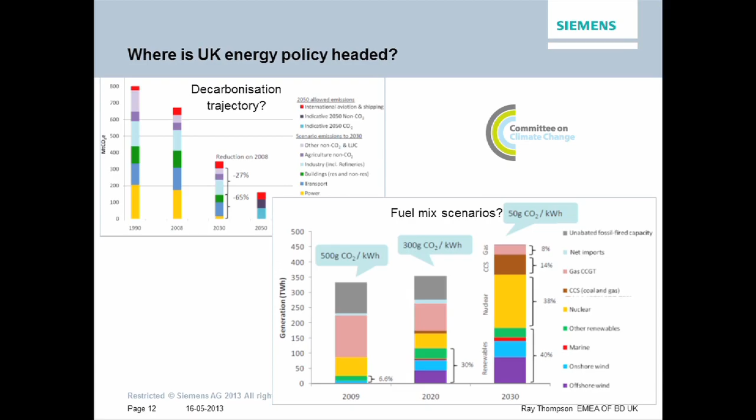Again, a busy slide, but this is really just about energy policy. Top left is the track we're on, trying to decarbonise UK supply, and perhaps more importantly, bottom right is the mix of fuel supplies we're going to have. You'll see offshore wind is this dark purple colour—we're really at the early stages right now. By 2020 we'll have significantly more, and by 2030 the aim is for it to be a big contributor to electricity production in the UK.

The question always about wind is, well, it's an unreliable resource—some days it's windy, some days it isn't, and that's true. I've never actually heard anybody suggest we should have an energy policy based solely on wind; I think that would not be the brightest of moves. But every day the wind is blowing and producing energy on our system, we're not burning fossil fuels. So even if you're a fan of fossil fuels, coal and gas going forward, wind can help extend the life of those fuels.

The other element is cost. As somebody told me recently, every citizen of the EU pays about €700 a year in outflow of funding for fuel. When you pay your electricity bill, you see it going to the electricity company and think they keep it. But what they actually do is buy fuel on open markets. So most of the money from your energy bills, certainly electricity bills, ends up in Colombia, because that's where most coal comes from for coal-fired power stations, or the Middle East for oil and gas, or Russia for the gas pipeline. So there's a real outflow of economic benefit from the UK and European Union.

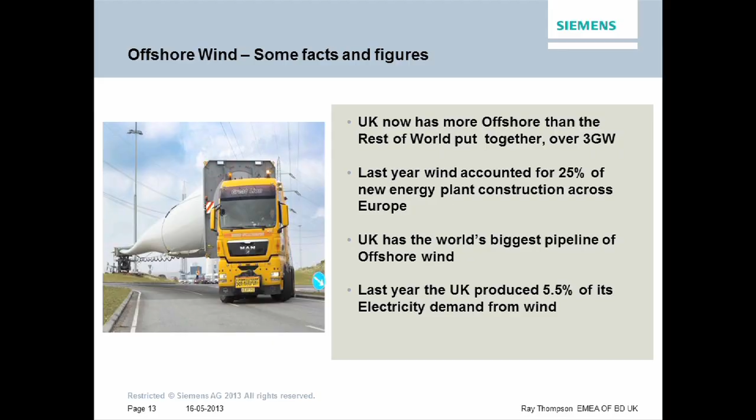And we've moved very quickly. Last year, 25% of new energy plant across Europe was wind, and we've got the biggest pipeline. Looking forward, we are the big market for offshore wind worldwide, which is why there's such interest from very large companies and industrial players such as Siemens. Last year, about 5.5% of electricity demand across the year was met by wind in the UK—I check it pretty regularly, actually, when I do these kinds of talks.

I often check the figures just before I come in, but I'm not going to tell you today because it's not a great wind day. Normally it can be quite high, sometimes something like 15% of electricity production on the system can be wind, but we're quite a light day today, so it wasn't too much when I checked this morning.

The photo to the left is beginning to introduce just how big some of the stuff we make for offshore wind actually is. That's one of our blades being moved, and you'll see the lorry at the front is leaving the roundabout, while the lorry at the back hasn't arrived at the roundabout yet.

We are making good progress, as I said. In 2012, we actually built the world's biggest wind farm, and I'm going to cover a little more detail about that on the next slide. We passed about 3 gigawatts of capacity of installed offshore wind, and it is a growing business.

Companies are investing in the UK. Last year we recruited 350 new service technicians from our base in Newcastle, in my part of the world. And of course, the more wind farms we build, you always need to keep increasing the service staff. Even if you're installing the same amount you did last year, you're cumulatively adding. We probably have something like 1,500 staff working on wind and wind projects in the UK right now as Siemens.

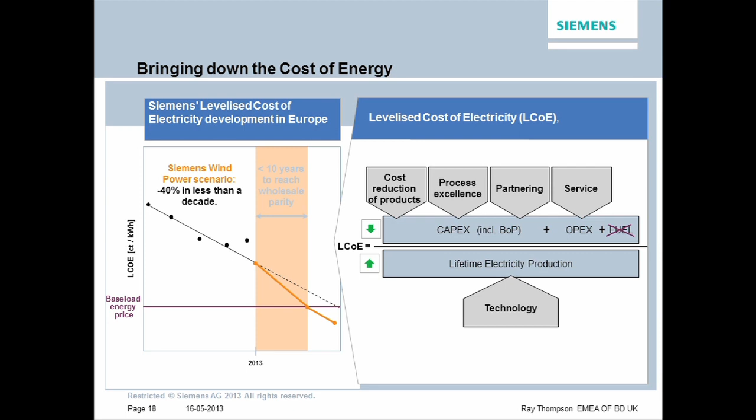We'll be there with onshore wind in this decade. Already that trajectory is set, and in other countries, particularly some South American countries where competing technologies are quite high, wind is already at parity - it's as cheap to build wind energy as it is for others.

The innovation comes through how we get there, and that's reducing every element of the cost of projects: the capital expenditure at the start, the operational expenditure of maintenance and keeping it going, and increasing the energy production from the turbines. So a lot of our technical innovation and focus is really geared about making the turbines cheaper, more reliable, but producing more energy.

I'm not going to go through all the detail of this, but there are really three main elements: the blades, what we call the nacelle, which is the generator unit, and the tower. All of our work is geared around how do we do everything cheaper, how do we get more energy per turbine out, because that improves the business case for the investors and developers.

So we're doing a lot of technical innovation, design and R&D on blades. If you've noticed some of the latest onshore machines, the blades are very much an S shape - we're preloading the blades so they're straight under wind load. There's lots of aerodynamics techniques and new material science coming into the blades.

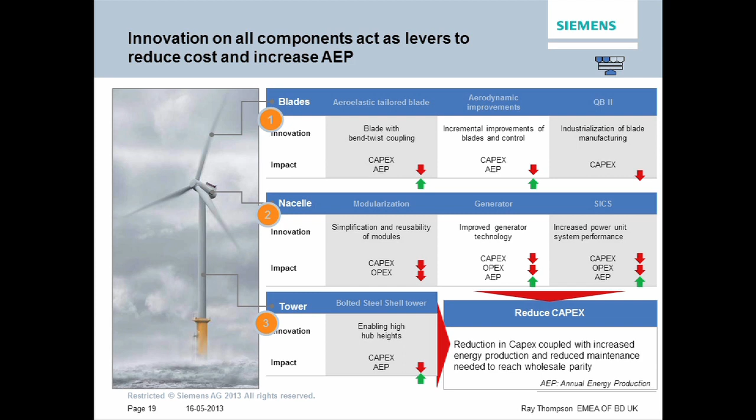In the generators, we're moving towards a different design. Without getting too technical, instead of having a gearbox and lots of moving components, the blades now simply turn the generator at low speed. We've reduced the number of moving components by about half. Whilst it doesn't save you any money in the short term, maintenance, lubrication, faults in the future, and reliability should all increase very significantly as a result.

We're even being innovative on things like towers. You'd imagine it's just a steel rolled tube, but we're looking at sections, bolted sections, all kinds of clever construction techniques for the towers. And then there's the bit underneath the water, the foundations, where people are looking at concrete designs, steel designs, all kinds of ways of reducing cost.

I mentioned a little bit about the blades. Really we are pushing the boundaries, I think, of some of the R&D and technical innovations on blades.

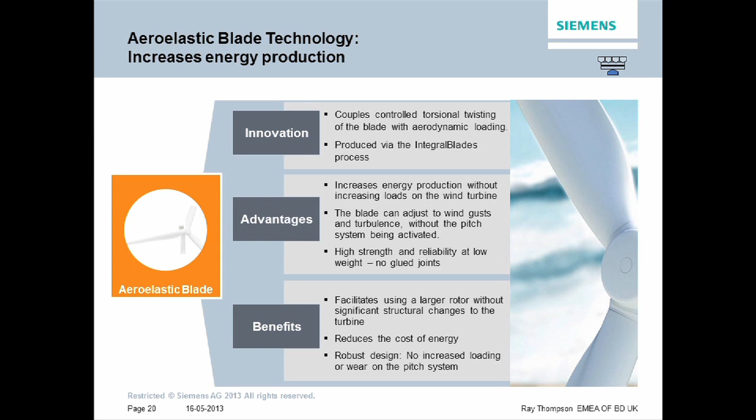Despite the size of the blades, and I'm going to show you more photos of the big stuff in a second, we make those blades in one piece, and that's quite a manufacturing challenge. So a lot of the innovation is not just about the turbine, it's actually about the manufacturing processes to get there. Obviously the joints are the weak spots if you mould it in different parts and join them together.

So we're very much progressing with a fiberglass type solution, relatively low cost, but high complexity to make. I mentioned that we're moving towards direct drive design, incorporating permanent magnets, so we don't have a gearbox, so you've got a lot less moving parts, a lot less weight in the turbine. That means that you can install it with a smaller vessel. It's easier to maintain, costs should be lower. And of course that all helps the energy production. We're really looking at squeezing every last drop that we can out of the wind and getting the most that we can out of these turbines.

The business case for the developers and the utilities and the people putting the money in really depends on the number of hours that you can get out. So a lot of the innovations are actually quite subtle.

One of the things that we've recently developed for the blades is a thing called dino tails. And if you imagine the little serrations on the back of a dinosaur's tail, you're seeing that a lot of our blades now have those added on. There's some very clever aerodynamics and science around the breaking up of the flow of the wind, and it actually gets about another percent of energy yield from the turbines. Now that doesn't sound a lot, but of course if you've got several thousand of those turbines out in the North Sea and you can keep them spinning, and keep them spinning at lower winds, then obviously you're driving down that cost through innovation all the time.

I've mentioned the technology, but of course the innovation isn't just R&D and technology innovation. As well as being smarter about the turbines we make, we have to be a lot smarter about how we make the turbines. One of the things that's really driving that right now is economies of scale. And of course, the more that you make of something, the cheaper it gets.

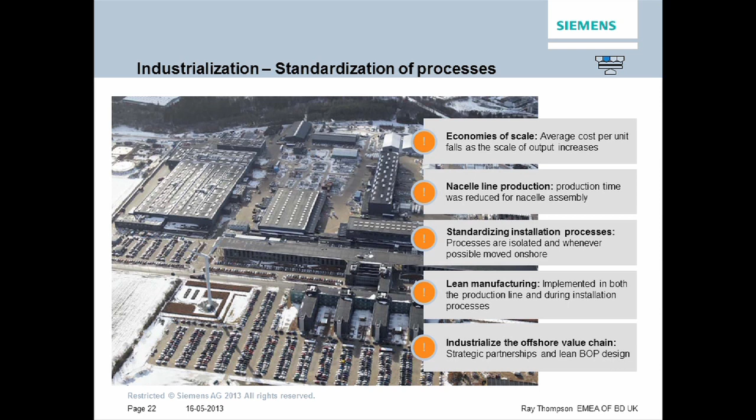We'll never be at a kind of automotive level of production and throughput that the car manufacturers make. But this is equivalent to some of our other businesses, for example making trains, where you may be in the 400 to 1,000 scale of production a year. And you really need to bring in lean processes and make sure that you are fully optimized in your internal processes, but also fully optimized with your supply chain.

To date, wind projects have been a little bit more of a project-focused business, a bit bespoke, developed for each one, and we really need to get towards a standardised product that we can produce and reproduce at lower cost. We'll also be innovative in the way we approach those global supply chains.

One of the benefits of being a large international company is you can really lever the global economics of that. So, for example, on nuts and bolts, clearly an organisation like Siemens is buying on a worldwide scale, and we have massive purchasing power across our businesses.

But there are some real economics that work for the UK. For example, if you imagine the very large towers that we need for offshore, clearly the labour element of that could be done cheaper in a low-cost economy in the Far East or in India or elsewhere. But actually the logistics costs of moving huge tubes 100 metres long, 7 metres diameter, which are basically just fresh air halfway around the world, really don't stack up. So there really should be some good, strong economic drivers for investment into the UK.

We're very much focused on the lean manufacturing kind of process and improving our productivity, and it's not by accident that our recently appointed head of the wind business globally is someone with an ex-automotive background and a production engineering background. So the whole industry is gearing up to move towards a much more industrialised scale.

And I've mentioned at the bottom there, that includes the whole value chain. Our normal scope of supply as Siemens is to supply the turbines and the towers, but we've really got to optimise cost across all of the elements. And of course, when you're building a wind farm, it's also the foundations, the cables, the substations and all the other elements that go to make it connect and make it work.

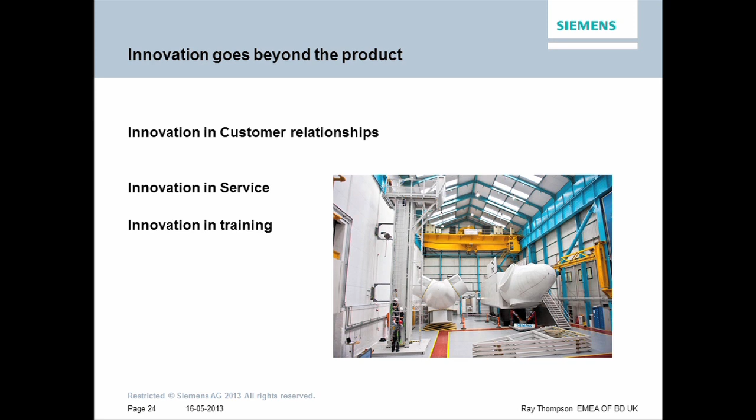Innovation again goes beyond the product. We are now really starting to look at the way that we sell and market turbines. We've stopped selling turbines—instead of a customer coming to us saying 'I'd like 100 of your latest design,' we're really needing a different relationship now, to work in partnership, to design the wind farm, to lay it out, to work on the consenting, to work on maintenance strategies, and really to work jointly on a business case to drive down costs. Simply selling turbines is gone, I suspect, for offshore wind. So there's innovation in that respect as well.

I've mentioned service—training is another area. We face an enormous challenge in gearing up for this. The picture shows one of the bays of our training centre in Newcastle, and you'll see we've got complete wind turbine components in there. We'll train about 1,000 technicians through that centre over the next 12 months. In fact, they're running shifts—there's so much demand from technicians to get on the equipment and be trained that we're having to do the training in shifts.

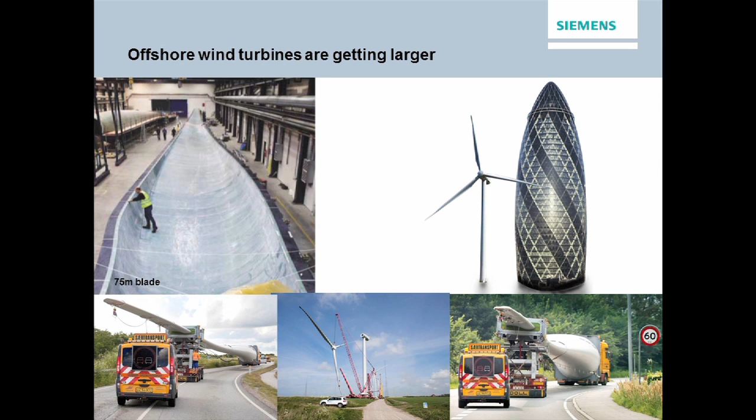The bottom photos show our first prototype machine. We are moving towards this direct drive design. In the early stages, we've made massive investment in the technology, but not yet delivered that into projects, so we're at the prototype stage now. We have 2 up onshore in Denmark, and the bottom centre photo shows that being lifted, and some of the issues around transport for the blades.

Key point here, of course, in terms of supply chain development for the UK and what the UK can do, we're looking at portside facilities. When you get to offshore wind scale components, nothing's going anywhere by road anymore - it's just not practical. We've managed to do it for the one-offs for the prototypes, those photos in Denmark, but that means closing the roads. If you want to do 30 a week, 5 a day, or whatever the run rate is, it's just not going to work. So we need portside facilities, and that's one of the real challenges for the UK in developing its supply chain.

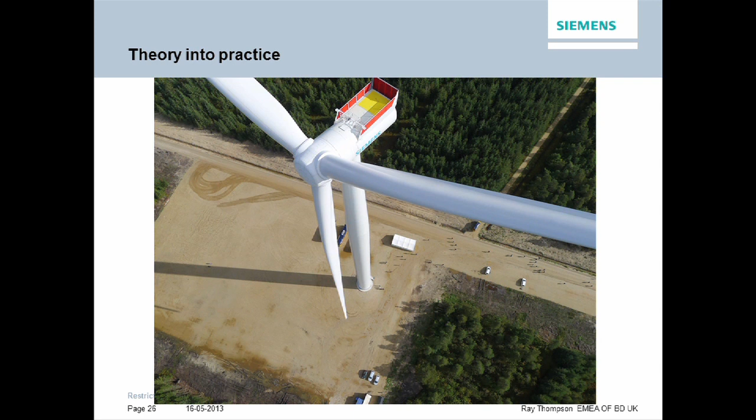Those little dots down there are people, and you'll see the scale from the vehicles, just how big a structure we are looking at. For each turbine offshore, we're probably looking at a structure well over 1,000 tonnes, counting the turbine, the tower, and the foundation - a big engineering challenge to make those structures.

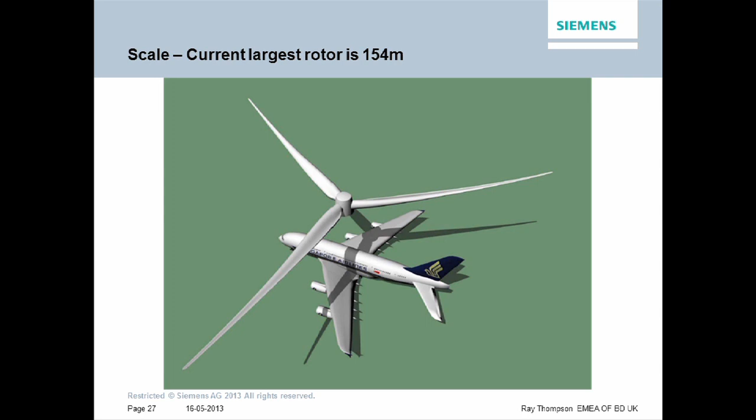To get the context of how big that rotor is, there's one next to an aeroplane - it's not just any aeroplane, it's the A380, the world's biggest airliner. You'll get a feel of the scale of just how big a machine we are talking about. It's mind-numbing when you're next to it - hard to explain until you stand next to it.

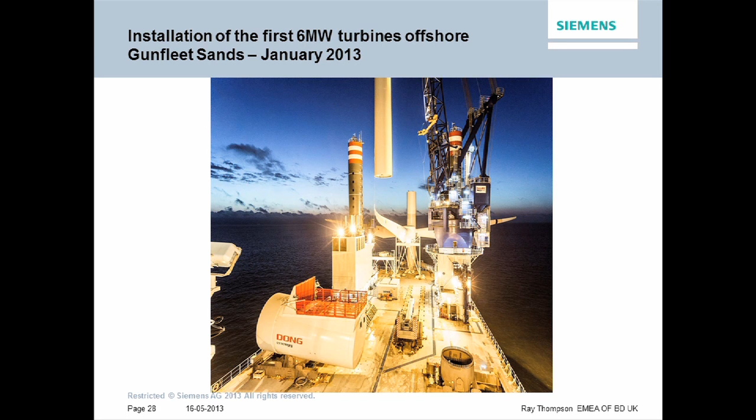I mentioned that we're at the early stages. We've passed a significant milestone this year, moving to installing the first 2 of these giant machines in UK waters. Again working with Dong Energy, the Danish utility, we put 2 up in a project called Gunfleet Sands in January this year. There they are being installed, and now running very satisfactorily and on test.

One more innovation - one of the things offshore wind has had to do is not just build the turbines, but build a complete set of infrastructure behind it. We're using these jack-up vessels now, a great way of carrying the turbines from the port out to the wind farm, carrying sets of components on the deck. When they get there, you can't easily lift from a moving ship and handle those very heavy components, so they have legs that jack down onto the seabed, the ship raises itself out, and the components can be lifted even if the sea is in quite a high state. The turbine is fixed, the vessel is fixed, so you can operate in harsher conditions. So innovation coming through, not just in the turbines, but in every aspect of what we do.

And that, I think, was the last slide. So I've left plenty of time for questions and answers. I'd be happy to take any questions.